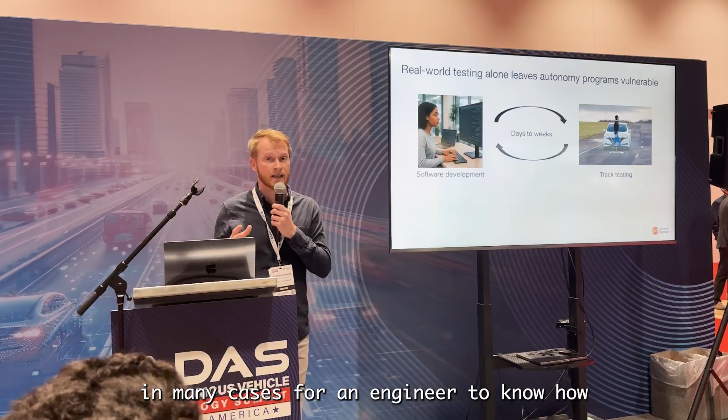And so what's the problem? Why might it be difficult to fix all of these issues ahead of deploying to the real world? Well, one of the main issues is that testing, especially autonomous vehicles, is a very difficult and slow process. In many cases, for an engineer to know how their software change may affect system performance, they may actually have to go put that vehicle on a test track. They may have to go put that vehicle on a road with a safety driver. And this is very slow. This can take days or weeks to get an understanding for how your software change actually impacted system performance.

And when you have a really long feedback loop, that means your development process is much slower. For anybody here who's a software engineer, if your code took days to weeks to compile, you would not be able to develop very good software, right? Your code needs to compile quickly. You need to be able to test things quickly. That's exactly what we need for autonomous system development.

And when that testing is slow, less testing happens, right? If it takes days or weeks to test your system, it means you're just not going to test as much as you really want to. Even if you want to test more, it's prohibitively slow, expensive, difficult to scale to do that. So ultimately, that means lower test coverage, right? If you're testing less, then you're not going to have the coverage you really want. But what if we could test at the speed of software, right? What if we could shift that testing from real-world tracks into simulation?

So the ideal workflow would be that the software developer makes a change, they're able to scale that into a simulated test suite and get at least a first-pass understanding for how their system is performing in minutes or hours rather than days or weeks. Now, this isn't final validation, right? It's a first line of defense to understand how the system might be performing so that you can sort out a lot of issues before you then go take the time to get to the track. So ultimately, faster iteration on your autonomous system means safer vehicles, and that moves us towards the goal that we started at the beginning of the presentation.

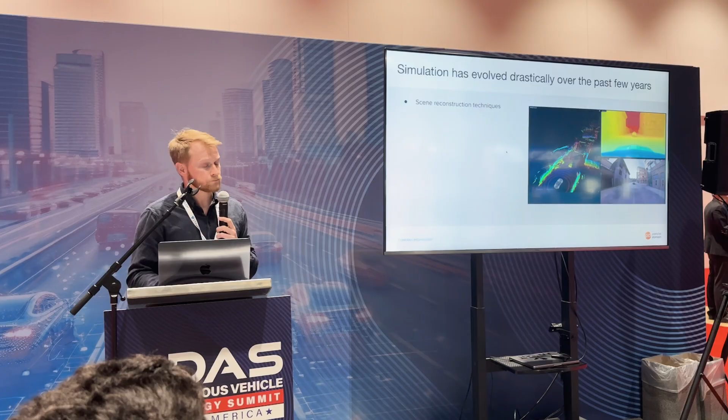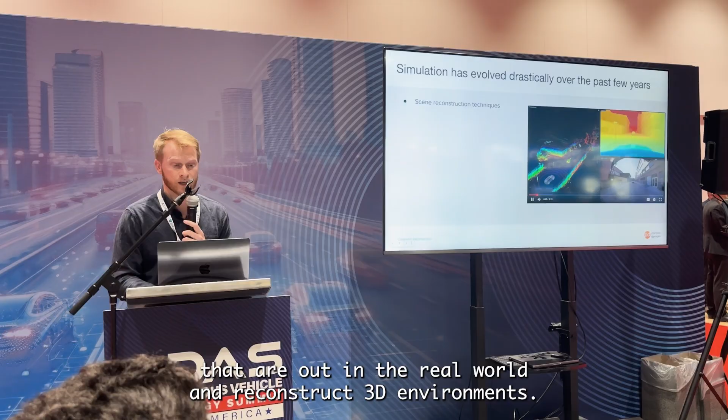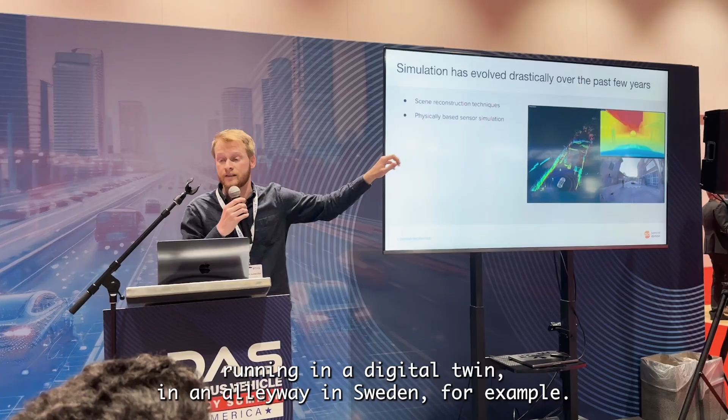So the latest 3D reconstruction techniques have enabled us to take real-world data from driving logs, flight logs from robots that are out in the real world, and reconstruct 3D environments. With those 3D environments, we can do physically based sensor simulation. So here you see a fully virtual simulation of camera, lidar, and radar running in a digital twin in an alleyway in Sweden, for example.

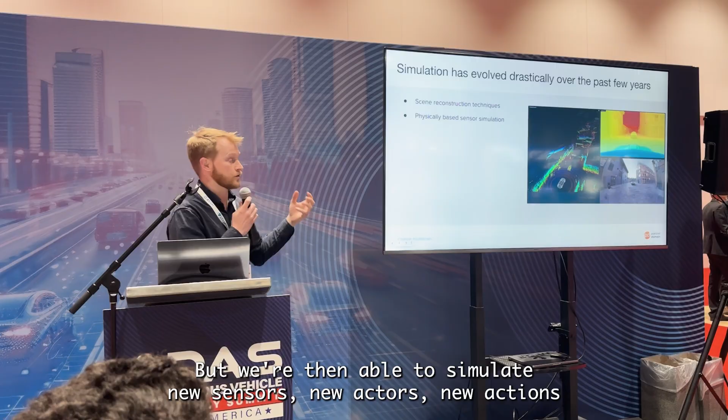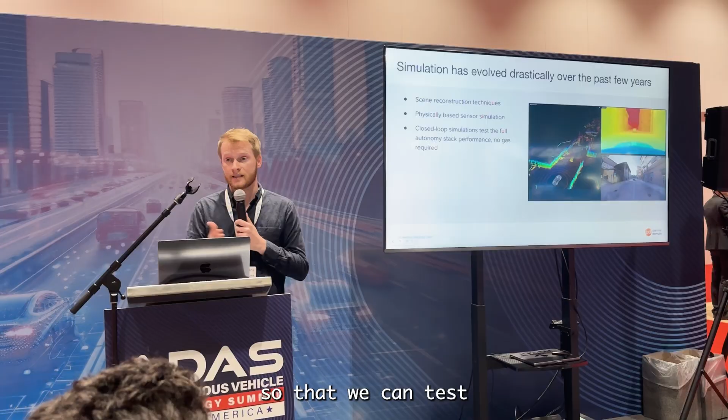The real data for this digital twin was captured by driving a car down that road, but we're then able to re-simulate new sensors, new actors, new actions inside of that environment, all inside of the simulation software. The idea here is to evolve this into a closed-loop simulation stack so that we can test an autonomous system's performance in a virtual copy of a real place.

Right? So instead of having to actually go to that road, go to that track, go to that alleyway, and test your new software in a car, you have a virtual replica of that. You have a digital twin of that place to test in simulation. Advancements in hardware and the ability to scale this up in the cloud means we can test thousands of virtual cars at the same time rather than having to reserve time at a track or get physical vehicles out there.

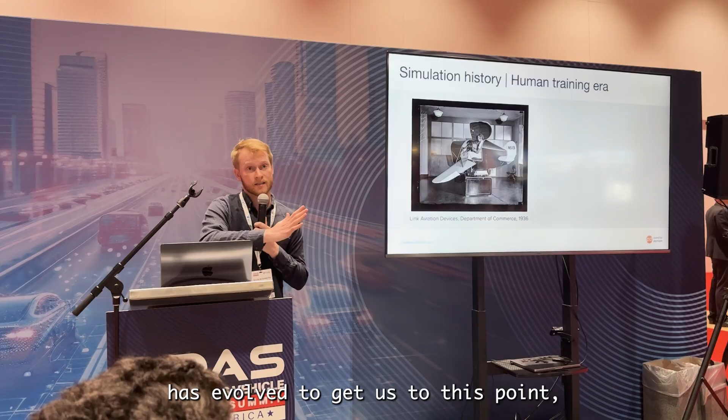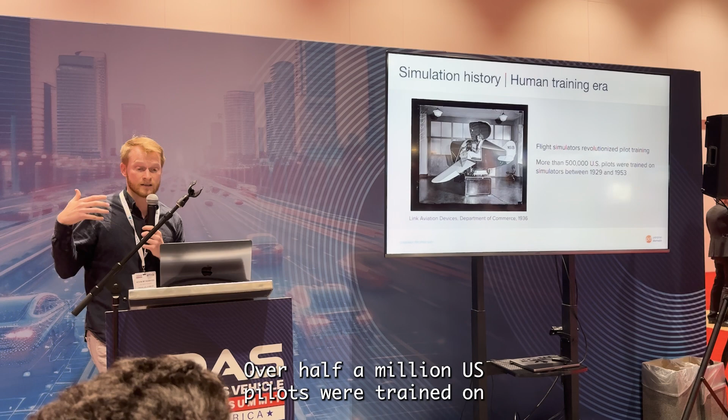So I want to do a quick walkthrough of how simulation technology has evolved to get us to this point, and then we'll talk about some of the impact that's having. So there are a couple of eras in simulation. The first is the human training era. Back in the mid-1900s, flight simulators really revolutionized pilot training. Over 500,000 US pilots were trained on simulators between essentially 1930 and 1950.

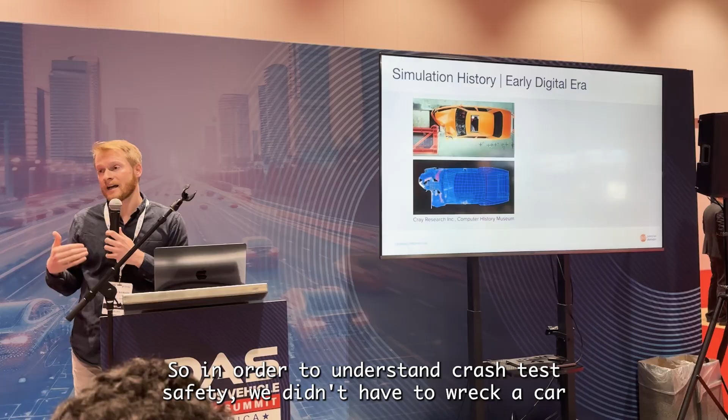From this human training era, we moved into a digital era. That's where a lot of things like crash testing was able to move into software, or at least be augmented by software. So in order to understand crash test safety, we didn't have to wreck a car every single time we wanted to run a new test. Maybe we would only do the physical crash test after we've run a bunch of simulations and had some confidence that the system was going to perform well.

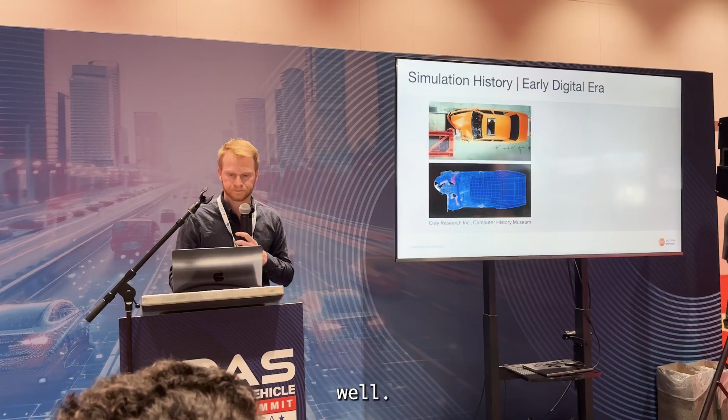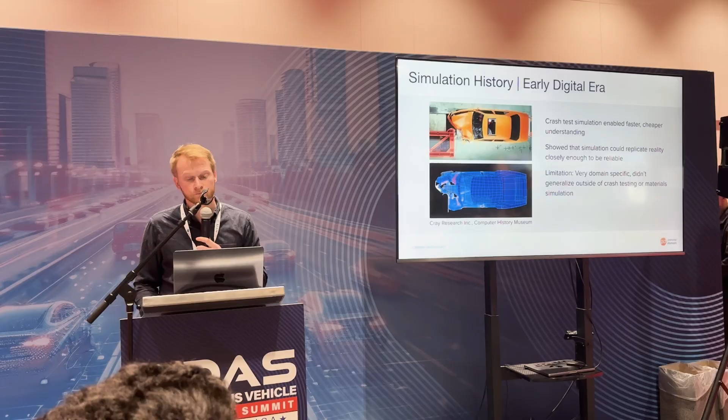This did show that simulation can replicate reality closely enough to be an extremely useful part of the development process. But there was a big limitation here. This is very domain-specific simulation. Crash tests like physical deformation and finite element simulation don't really scale to the types of AI testing and validation that we need today. So there were some limitations in terms of how this could be applied to generalize outside of crash testing.

That brings us to the next era in simulation, which I would probably mark as roughly 2005 through maybe 2015, which is the video game era. Using video game and graphics engines to create simulations that were certainly richer and higher fidelity than what existed before. And this made simulation more interactive, more scalable, easier to visualize what's happening. There's pretty wide adoption of these kinds of techniques within autonomous vehicles and ADAS companies.

The other problem with this approach is that it's not scalable. To create more and more of this content, you need lots of 3D artists. You can try to lean on something like procedural content generation, but you need highly qualified programmers to write those algorithms. And it turns out it's pretty much impossible to write a procedural algorithm to generate the entire world. So there's scalability and fidelity problems with these old approaches.

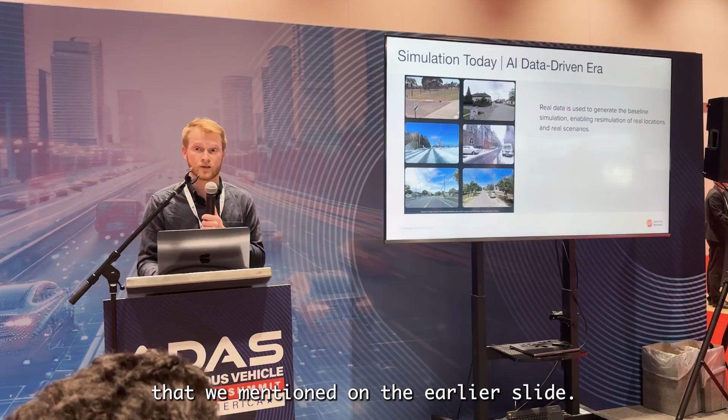It significantly decreases the domain gap that we mentioned on the earlier slide. This data is now much more faithful and realistic to what you observed in the real world. And the second piece is that you can control what's happening inside that simulation. So it's very scalable. We're going to show examples in a minute of adding jaywalkers into a real drive, changing the lane change behavior from a real drive.

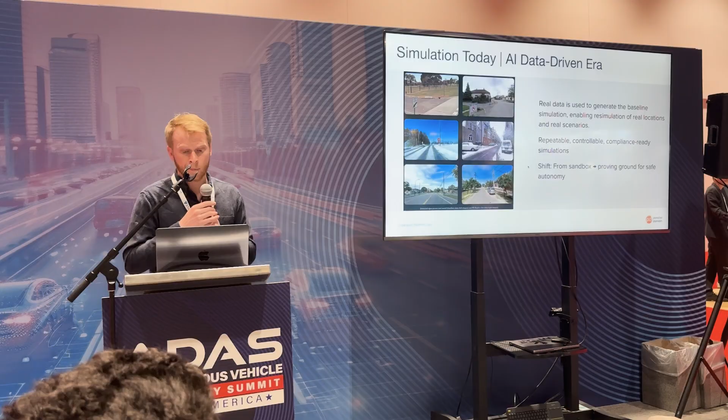And these new variations enable you to scale the amount of simulation that you're running quite broadly beyond what was possible before. And so what we're seeing is simulation, especially virtual simulation for autonomous development, is really evolving from sandbox experimentation to a proving ground, to a virtual proving ground for autonomy. And lots of our customers are starting to adopt this at a production scale, running these simulations every day.

And as this car drives down the street, we're able to use the simulator to insert, there's actually a moose at the end of that street. Now there's a mail truck. Now there's a jaywalker. Now that jaywalker is a child instead of an adult. Those are all programmatically controlled through the simulator.

We're reconstructing physics collision meshes, semantic information about the scene, material estimation about that scene, so that we can do a couple of things. So that we can resimulate a bunch of different sensors. So from just camera captures, we can create a reconstruction and then simulate lidar and radar. On top of that, we can insert physics-based agents.

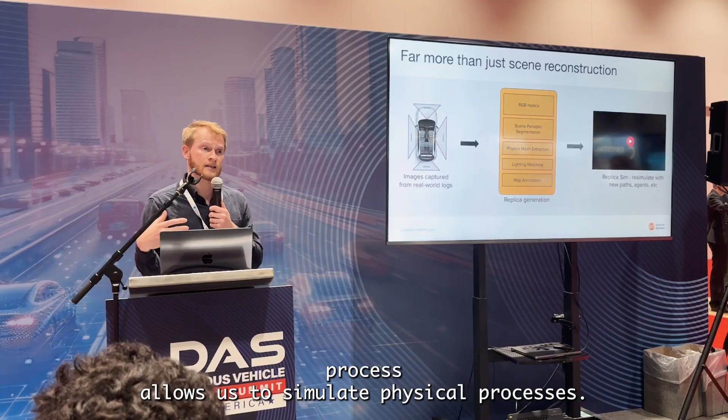You can drop objects on the ground. You can have people walk across the streets. You can have cars collide against things. So all of this extra metadata that we're creating in the reconstruction process allows us to simulate physical processes, both sensor and non-sensor.

And so as a reminder, the process that we're trying to accelerate is it takes a software developer days to weeks to go put something on a track and test it. Can we make that virtual? The idea is, well, what if you just made a copy of that testing track in simulation? So here's an example of Mcity in Michigan, a fairly well-known real-world testing track. A lot of our customers test their vehicles here.

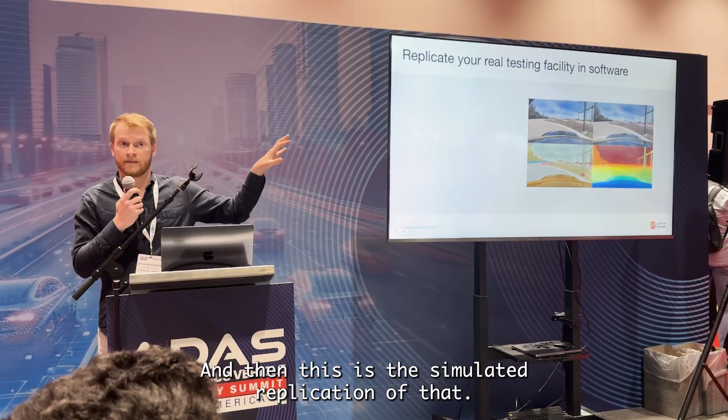This is a simulated fly-through, as you can probably tell from the camera movement. That is created by just driving on the track and collecting real data. And then this is the simulated replication of that. We're now simulating camera, lidar, radar inside of that testing facility. We're simulating multiple cameras at the same time. All of this is programmatically controlled. So adding a new camera is just a new line of code within this digital twin.

And so ultimately that enables our customers to test quickly in software rather than in the real world. And then you only spend time on road once you've solved the problems that you should have detected and solved in simulation, right? It's just like programming. You quickly get hints from your development environment, whether or not you've made a typo, whether or not a variable exists or not, right? You find out right away if there's a problem.

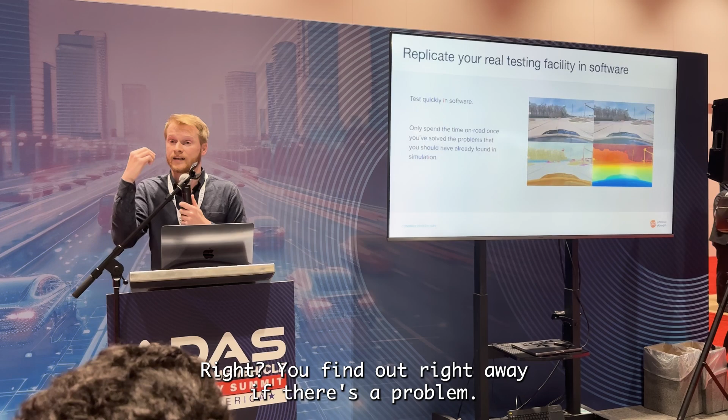Only once you've solved those simple problems do you move to deploying your software. It should be the same thing for autonomy. You should get a quick understanding in simulation of how your system is performing, and then go put it on the real track afterwards. So the idea here is test without leaving your desk, right?

Be able to test that system virtually right in simulation. Control the tests you need. You have faster development cycles because of this. You can replay and alter recorded drive logs.

And difficult cases, like we see here, the Euro NCAP suite, where we're actually colliding with the back of a car that's in a road, we can now replay these in simulation. It's the same scenario, but copied and pasted on replicas of real places. This is Germany, Tokyo, US, multiple different locations here, all running the same scenario, but on different roads, right?

So what if you could take that Euro NCAP suite that you typically have to go to the track to test and actually replicate it in every place you've ever driven? And the idea is that you would do this in a closed-loop simulation. So you're regularly monitoring and tracking how your system is performing.

Every time you make a code change, how do you rerun those scenarios on every street so that you understand if you introduced a regression, so that you understand if you actually solved the problem that you were trying to solve. And this really helps people gain a quick understanding of how their system is performing.

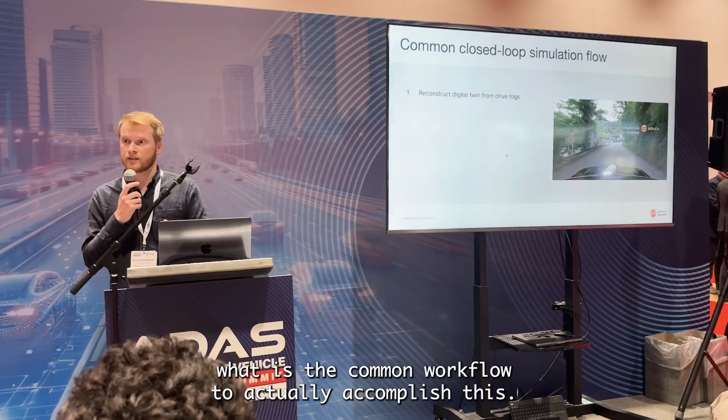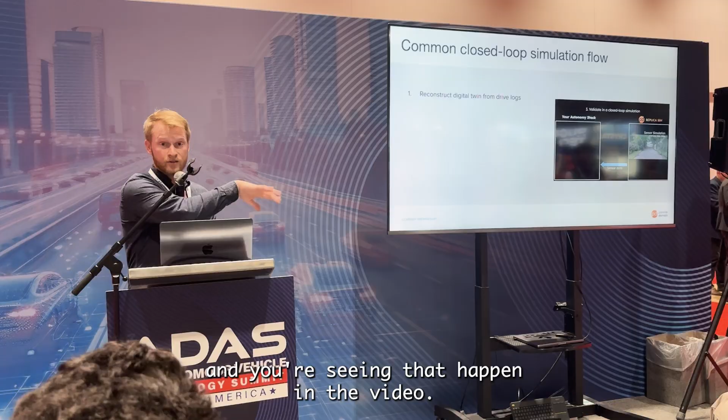So here we want to talk about what is the common workflow to actually accomplish this, and whether you're doing this with our software or whether you're using some other simulators out there, we generally would recommend the same workflow. First, you start by reconstructing a digital twin from drive logs, and you're seeing that happen in the video here. You go and drive in a real location, whether that's your test track or a public road.

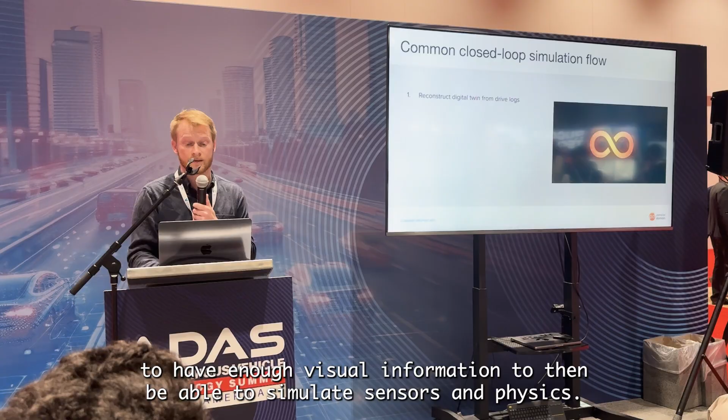From that drive log, you create a 3D reconstruction. That reconstruction, as we mentioned before, needs to have physics information, needs to have enough visual information to then be able to resimulate sensors and physics. But with that, you can resimulate with variations. You can start to insert new agents. You can control the agents that you already captured and move them around.

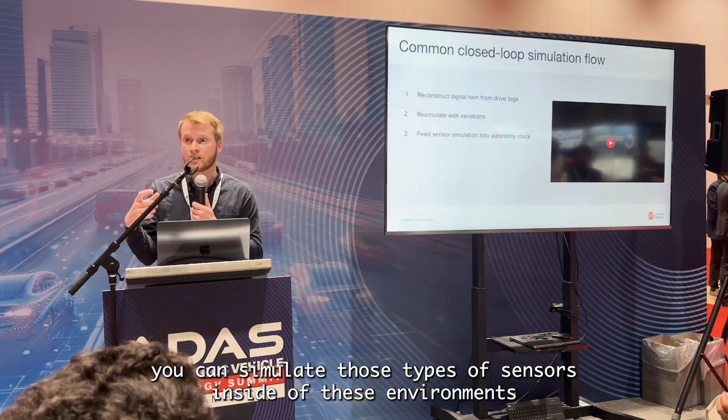And then you can generate sensor data. So camera, lidar, radar, sonar, near infrared, thermal cameras. You can simulate those types of sensors inside of these environments and actually feed that data back into your autonomy stack so that you're forming a closed loop for testing.

Here's an example of creating a digital twin from an open data set, from the WayveScenes data set. So the input for this is just a single drive down this road, a van that had a bunch of cameras on it. From that, our system is able to recreate the environmental digital twin, but then insert new actors and agents driving, walking, and participating in that world.

I haven't mentioned this part yet, but all of this is controlled through a Python API. So you can write code that programmatically controls variations and creates new actions and behaviors inside of that environment. Here's an example of doing that. So we're going to build a testing suite for jaywalkers, for example. So what you're going to see here is a bunch of different people walking across the street at different angles. And then we're going to copy and paste that logic across a bunch of different locations.

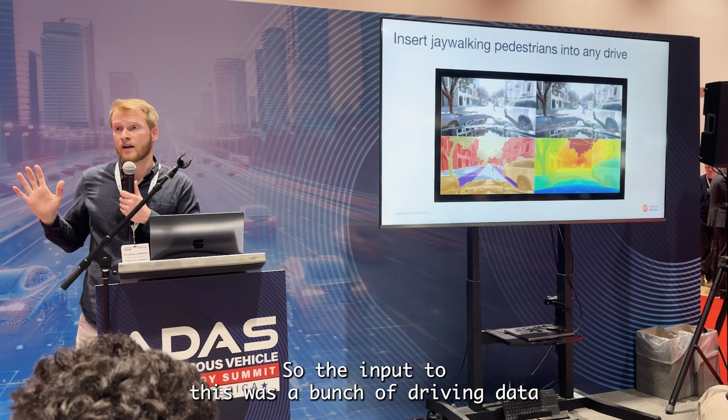So the input to this was a bunch of driving data where there were no people at all, or there could have been people, but they weren't jaywalking. And through the simulator, we can use the Python API to actually insert new pedestrians walking through that street, right?

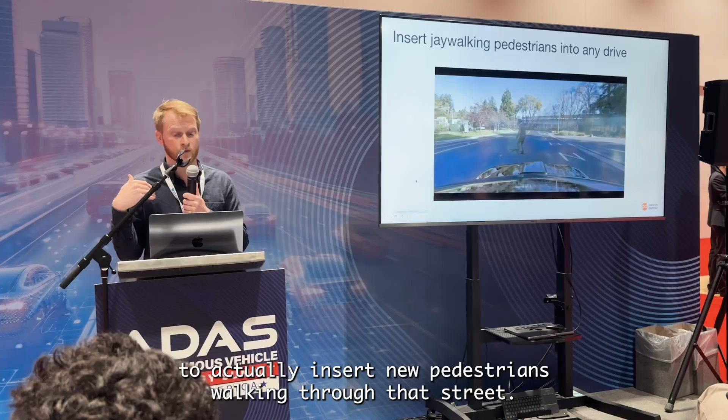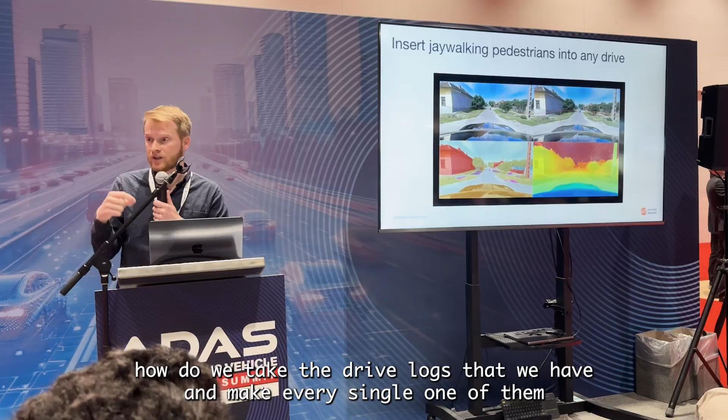So the idea becomes, instead of trying to drive around in the real world and find examples of people jaywalking across the street, how do we take the drive logs that we have and make every single one of them a jaywalking scenario? How do we take the drive logs that we have and make every single one of them an emergency vehicle scenario by inserting an ambulance, for example?

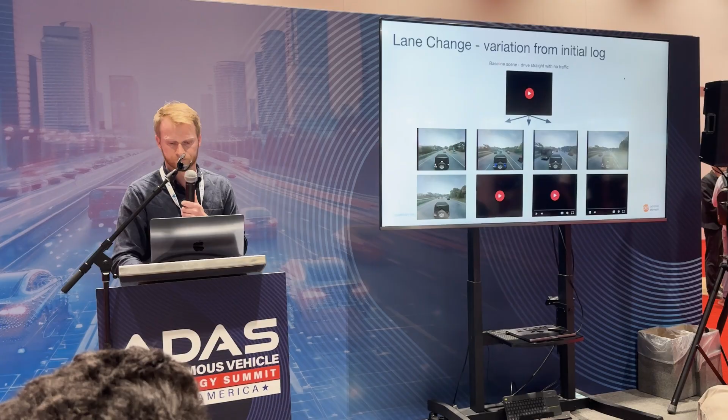So when you take all of these variations, we have an ability to generate a whole wedge of different behaviors from one initial drive log. So you're taking one drive log and you can create tens, hundreds, maybe even thousands of variations on top of that. Now we could test how our autonomous system might change lanes on Highway 1 at this specific exit with programmatically controlled traffic configurations. That becomes really interesting for autonomy development, where this would be near impossible to do in the real world.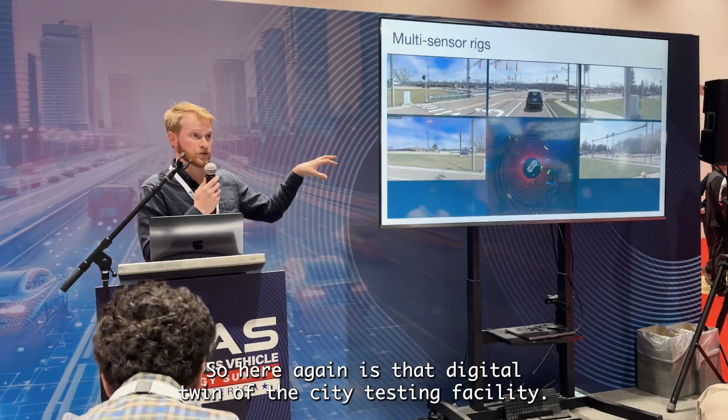I mentioned this a few times, but I do want to highlight one of the advantages of this 3D reconstruction approach is that you can simulate multi-sensor rigs. So here again is that digital twin of the M-City testing facility. This was captured using just a couple cameras mounted on a car. The M-City team actually went out and captured that data. We're now resimulating a totally different set of cameras. These were not the cameras that were originally on the car.

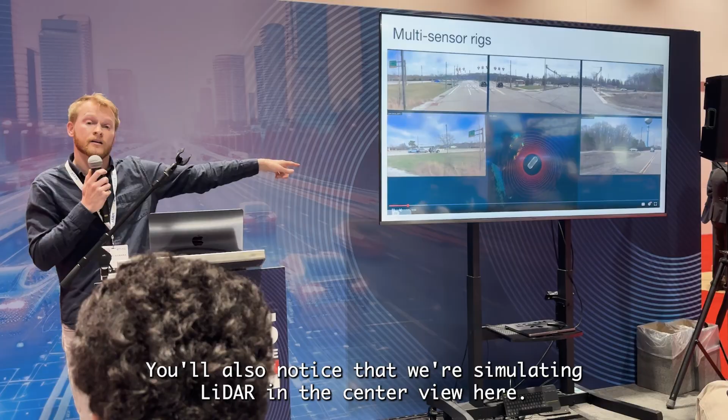You'll also notice that we're simulating lidar in the center view here. There was no lidar on that car originally either. So by having the physical approximation of the geometry and materials and semantics of the scene, we're then able to simulate versions of active sensors like lidar and radar.

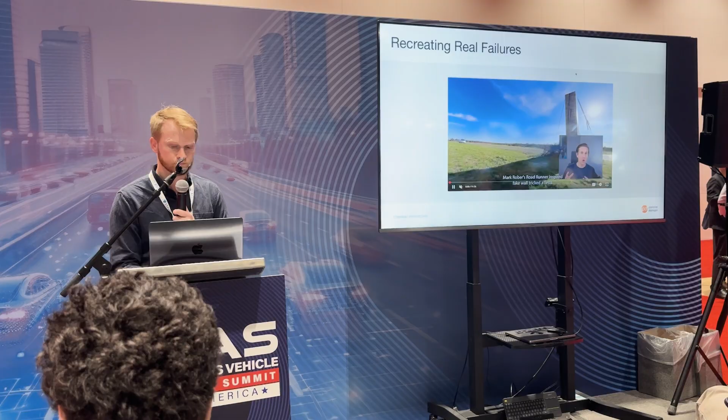Michael, who's also here, you can talk with him at our booth afterwards if you want, has done some really interesting work around recreating real-world failure cases. There was this example video from a YouTuber named Mark Rober who took a Tesla and a bunch of other cars and drove them at a cartoon Looney Tunes style wall, right? What if you paint a brick wall? What if you paint a road? Is the car actually going to hit the brakes?

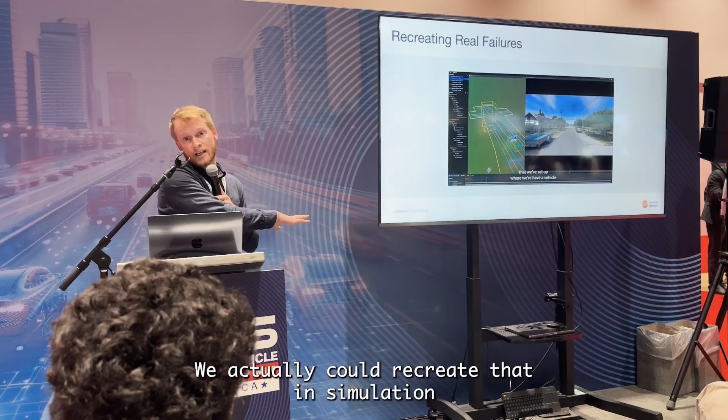We actually could recreate that in simulation and show that standard off-the-shelf perception systems that are camera only make exactly the same mistake because they mistake the painting on the wall for depth. But as soon as you add a lidar sensor, for example, the lidar is going to immediately see that that's a solid wall, and the perception system hits the brakes instead. So there's really interesting ways to recreate failure cases that you might care about inside of simulation as well.

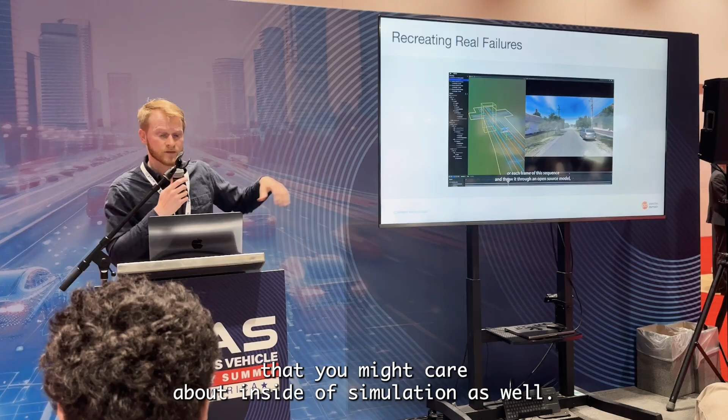So, back to the development process. This whole idea of augmenting your real-world testing with simulation and accelerating your real-world testing with simulation, it's something that we call shift left, right? So typically, testing and validation in the real world happens towards the end of the development process, where you've built most of the system components, you're finally getting a car out onto a real road, you have all the hardware and software loaded onto that car. Often that testing happens very late. It doesn't happen at the scale you want it to, and it's very difficult to control the conditions you want.

So a couple of quick lessons of working with customers in the field on this. As I mentioned, we've got people doing drone delivery, ADAS development, autonomous vehicle development, autonomous tractor development. They're all using these kinds of digital twins on roads and farms and backyards for actually testing their systems in simulation. What we're finding is that setting this up as a daily regression testing system is extremely valuable, right? You may have anywhere between 1 and 500 engineers working on your autonomy system. They're making a lot of changes throughout the day.

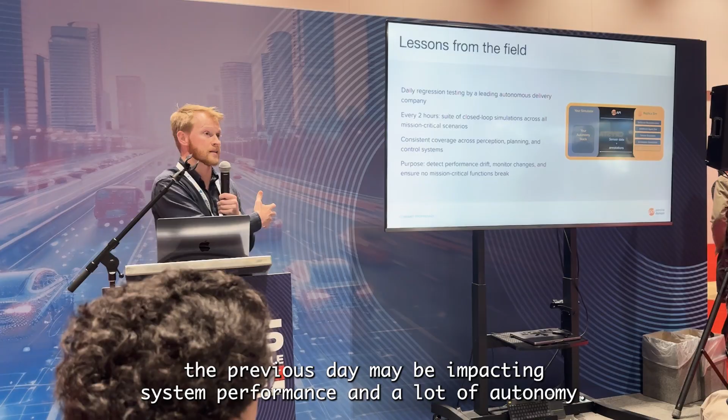If they could kick off an automated regression testing simulated suite at the end of the day, come back in the morning to a report as to how the system performed, that's a ton of extra insight on how the work that they did the previous day may be impacting system performance. And a lot of autonomy developers don't have that today because they would have to actually go put vehicles out on a test track or out at one of their testing airports, for example.

Some of our customers are even running this as a CI/CD workflow every couple of hours. When submits get committed, the tests kick off and they rerun. Sometimes they even have that as a gating factor to release. You have to pass a suite of tests before your PR can actually be accepted.

So ultimately, simulated testing can lead to frequent early detection of problems. That's extremely valuable. But also real-world testing is critical for final validation of a system, right? There still is some degree of domain gap between simulation and the real world. Now, as we talked about today, the technology advancements have really drastically closed that gap, even in the past 24 months. But the combination of these two together, we think, is the most powerful.

And that's why we really advocate for combining them. We're not advocating that you replace real-world testing with simulation. We're advocating that you start simulated testing much earlier and you use that to augment your real-world testing. So that's why we say software augmented testing.

So physical testing typically stops when the track closes. Simulation never sleeps. And the idea is that you can run simulation while you are sleeping. So the idea is that you finish your work at 5 p.m. at the end of the day and you submit a suite of simulated tests, and that's going to run overnight. You come back in the morning and you have a result. Use that time where software can be doing this testing for you.